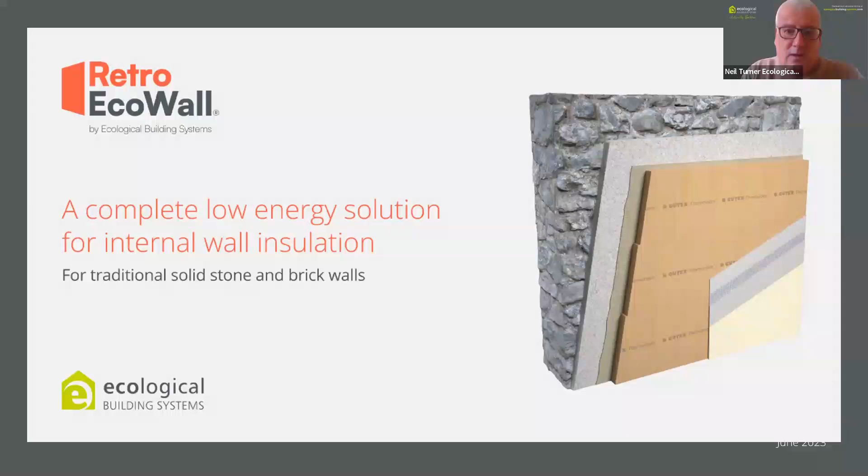Well, good afternoon, everybody. My name's Neil Turner. I work for a company called Ecological Building Systems. What we do as a business, we supply the whole ProClima range of air tightness membranes, tapes, and seals. But then we also supply a range of natural insulation products. So we supply wood fiber, hemp, jute fibers, and also a new product that's made from grass. For some reason, I've locked up. Here we go.

So just to say a little bit about myself. I'm a bit strange, really, because I'm a scientist by education. But for the last 25 years, I've worked in the construction industry. Most of my experience is manufacturing Warmcel cellulose insulation. But I've been with Ecological 9 years now. I'm still involved in a couple of CEN, Committee for European Norm standards, looking at test methods and developing new standards for new insulation products. And I'm also a former member of the Thermal Insulation Manufacturers Association Competent U-Value Scheme.

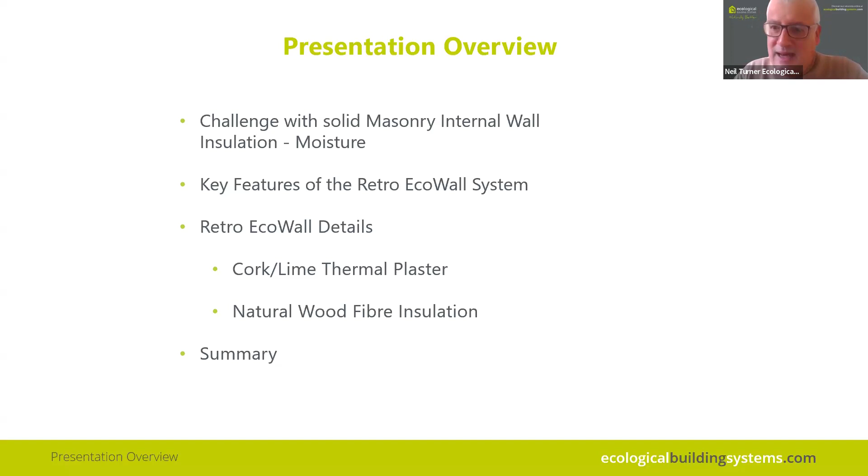So what I'm going to talk about briefly this afternoon is an internal wall insulation system for solid masonry. I'm going to start by talking about the challenges of insulating solid masonry walls as opposed to cavity walls, and some of the features that you have to consider. I'm then going to talk about what we call our Retro Eco Wall system. It's a combination of an insulated cork lime thermal plaster, used as an insulating base coat, and then natural wood fiber insulation. And then I'll summarize. So in terms of retrofitting buildings, the biggest issue that you can have with existing buildings is actually moisture.

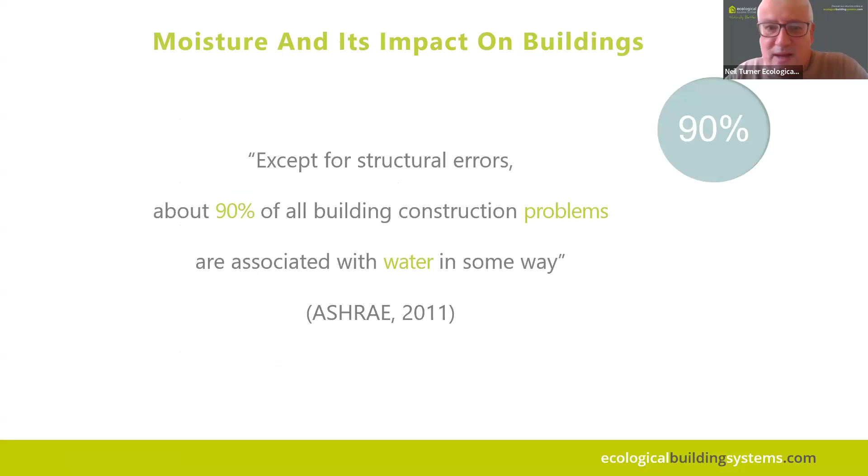So except for structural errors, about 90% of all building construction problems are associated with water in some way. And this is a particular challenge when you're looking to internally insulate buildings, solid wall buildings. So if you look at the UK as an example, we have a number of different types of solid wall. So you can have a solid brick wall or a rubble stone wall, and then combinations of rubble stone wall with brick backing, or you can have ashlar stone with brick backing or ashlar stone with rubble backing.

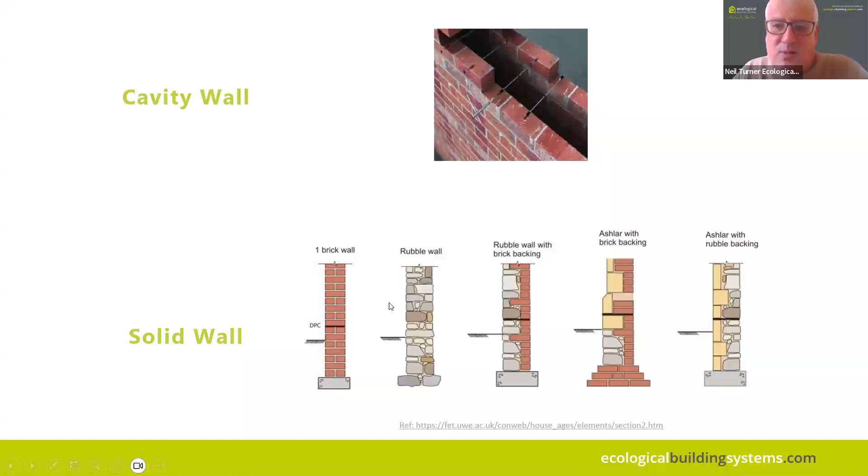Now, in the UK, it's estimated that we have about 8 million properties which are solid stone wall. Now, the main difference between solid stone wall and what you see up here, a cavity wall, and this took off in the UK in the 1930s. But what you have with a cavity wall, all things being equal, is that your inner leaf is actually protected from the effects of wind-driven rain by the outer leaf and the cavity. So it's less risky to insulate internally on a cavity wall than it is on a solid wall. So what you don't want to be doing is insulating your wall internally if there is a moisture problem.

You can also have quite a bit of built-in moisture within building materials. And also you can have rising moisture from ground level. Many of these old buildings don't have damp-proof courses, damp-proof membranes. And it's actually encouraged in some cases for moisture to be able to move both from outside to inside and inside to outside. So if you look at the mechanisms of moisture transport through a wall, it could be vapor diffusion, vapor convection, and also capillary action and surface diffusion.

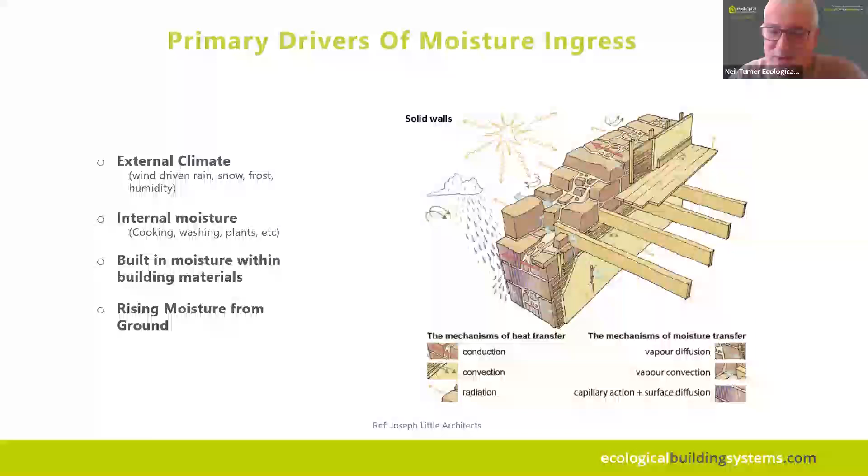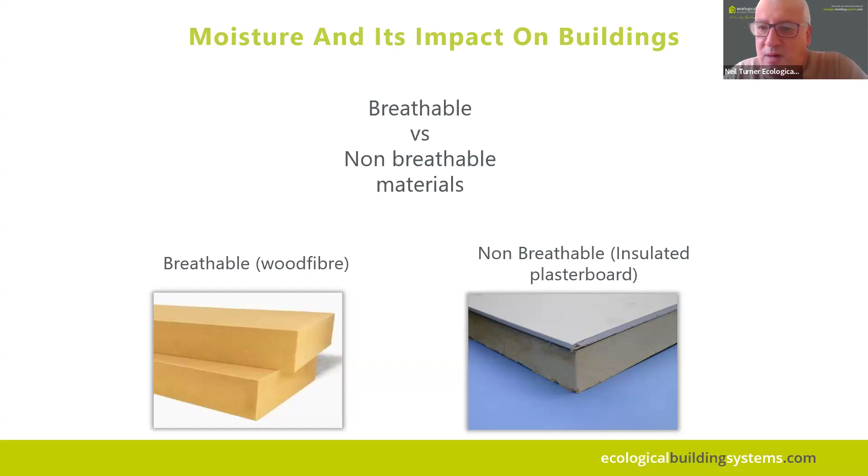So in terms of insulation, if you're looking at internal insulation, I know in Europe, many people opt for external wall insulation. But what tends to happen in the UK, a lot of these buildings, the solid masonry buildings, for planning reasons, you're not allowed to insulate externally because you're changing the appearance of the building. So many people opt for internal wall insulation. And there's basically two types of approaches that people adopt. So you can either use what we would term as breathable moisture vapor diffusion open insulation, or some people opt for non-breathable vapor closed insulation, such as insulated plasterboards.

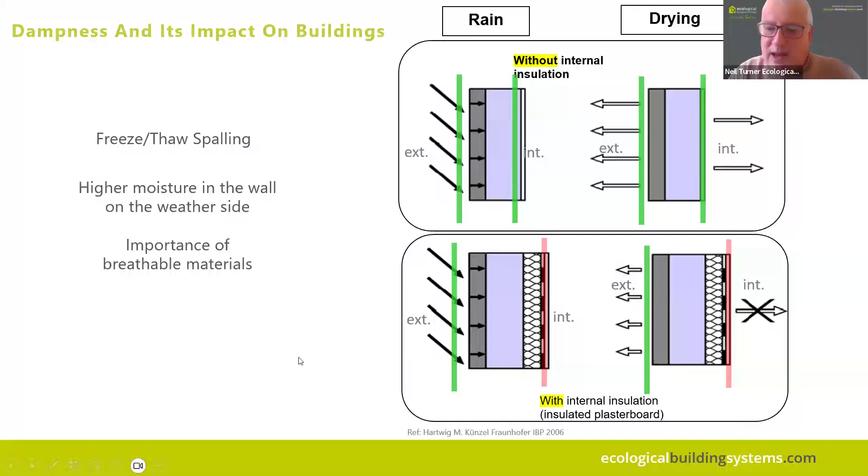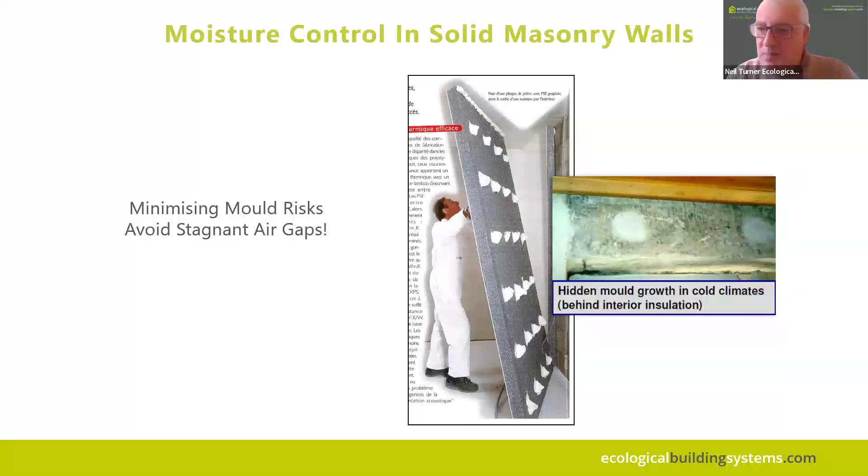The other thing to consider is you should always avoid still air gaps between insulation and your wall. This is a common technique that you see in the UK, where people actually use what they call dot and dab. So you've got this insulated plasterboard that's not breathable, and it's being dotted and dabbed onto the wall. And then that's trapping cold, moist air behind. So what we always promote are full contact systems, so that you've got a clear moisture diffusion pathway and no potential for mold or condensation in the cold still air gap.

It's always a good idea when you're insulating internally on a solid wall to do a hygrothermal assessment. The most common system used is actually WUFI. There is another software program called Delphin as well. But quite often, a lot of clients will just use the condensation risk software that you have with the U-value package, and that's known as a Glaser calculation.

Whereas WUFI has a lot more information that it calculates. You've got real climatic data, inside and outside temperature, and you can set the inside humidity depending on what you're predicting it is. It also takes into account the absorption of light. So if you've got a dark brick or a dark stone, that can absorb more heat than something that's very pale in color, where you get more reflection, so you can potentially get more summer back drying with a darker masonry.

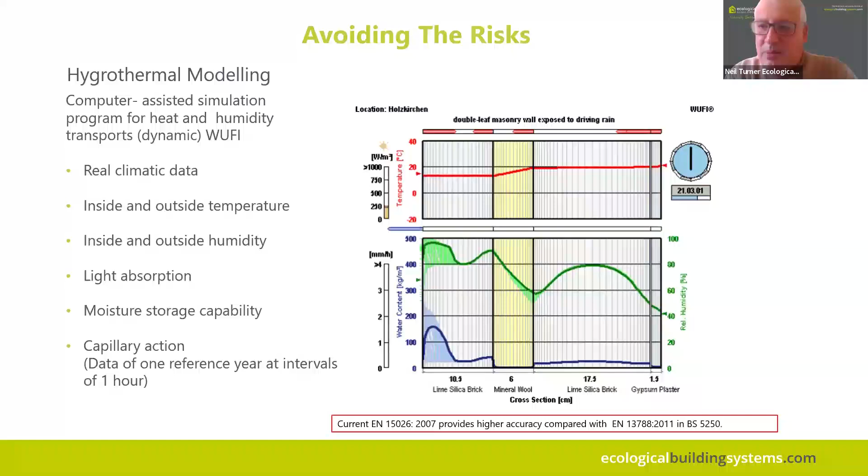Basically, the standard that WUFI operates to is EN 15026, and it's more reliable for solid masonry walls than the Glaser method. Now, in addition to breathability, another benefit is if you use insulation materials which are what's known as water capillary active. In other words, they can absorb some moisture, but then harmlessly release it when the climatic condition changes. Capillary action is the force that causes moisture to rise against the force of gravity.

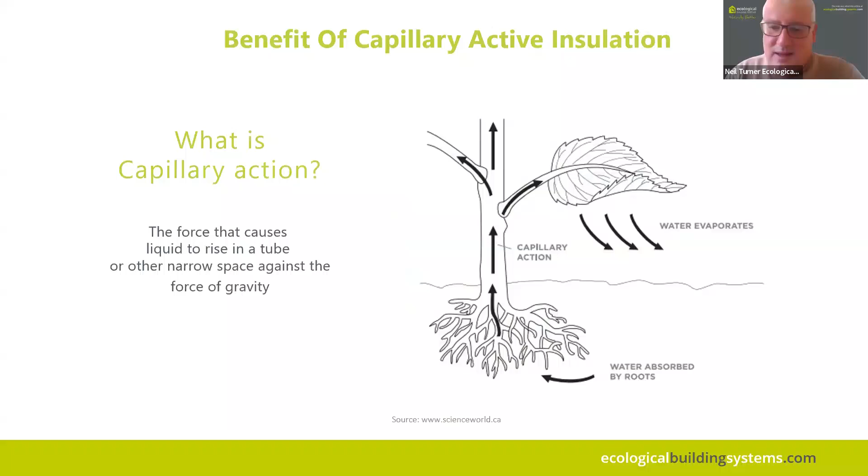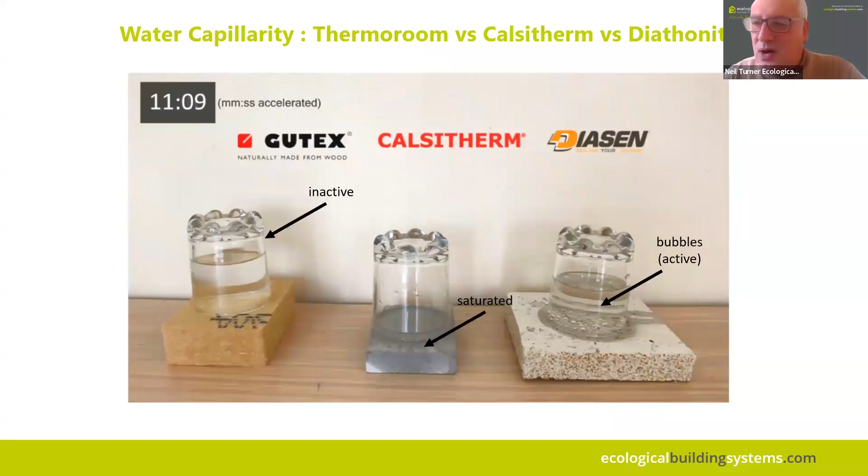I'm going to show you three examples here. On the left, you've got wood fiber insulation, which doesn't have a high degree of water capillarity. The one in the middle is a calcium silicate board, which is very highly water capillary active. And on the right, you've got a cork lime thermoplaster, which has some degree of water capillarity. So water capillarity is always a good idea to consider in these scenarios.

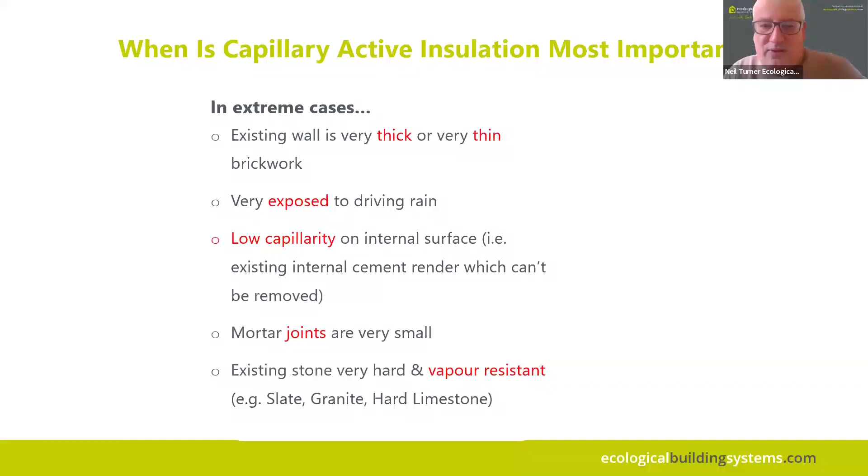If you've got a brick that's either very thick or very thin, if you're in an area that's very exposed to wind-driven rain, if you've got low capillarity on your internal surface, so if somebody's put a cement render on a wall and they can't remove it, then maybe consider a water capillary active system. And then the other two things are mortar joints, and where you've got highly vapor resistant stone, such as granite.

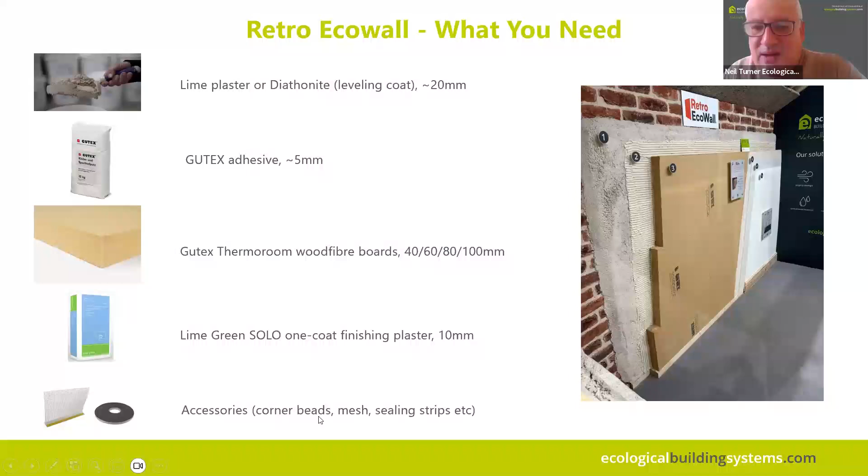So this is our main internal wall system, and it incorporates all of the things that I've just said. This picture on the right is at our display stand at the NSBRC in Swindon. What you have here is a lime level coat, and we actually promote the use of Diathonite as well, which is an insulating lime layer. Then you're bonding wood fiber insulation onto the lime level coat, and finishing off with a lime plaster and then breathable paint. There are other accessories as well, such as corner beads, mesh, and sealing strips.

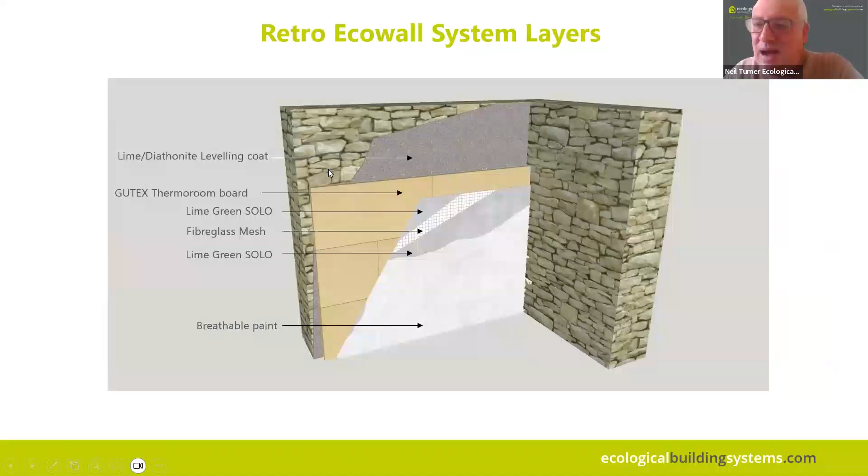This is just showing another schematic. This is your water capillary active insulating lime level coat, and you notice here that you're getting full contact between the insulation and the wall, with no air gaps whatsoever. So there's no potential to trap cold pockets of still air, which could give rise to mold. In the Gutex system we supply, if the wall's less than 3 meters, they recommend that you can just bond it with a breathable adhesive. If it's higher than that, they recommend using fixings as well.

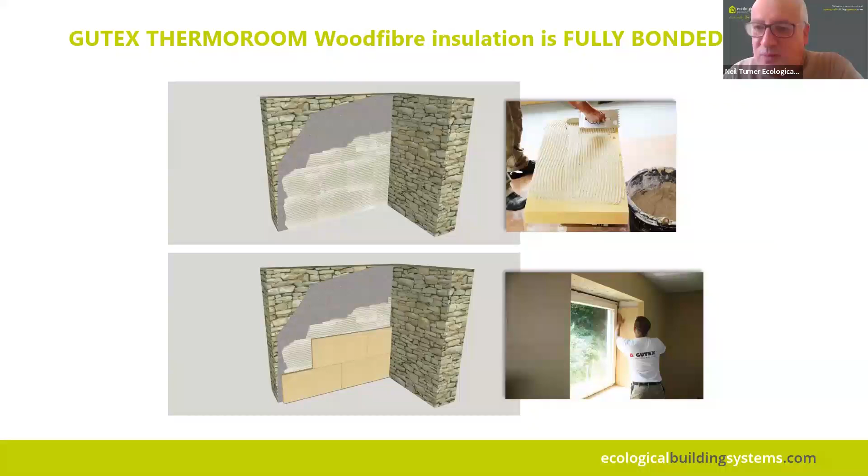I always like to show this in window reveals. It's always a good idea to install a thin layer of insulation. If you don't have any insulation in the reveals, you can get cold bridging, cold spots, and mold as well. So this is just the process. You've got your lime level coat, so you're smoothing off and creating full contact with the wall. Then you apply your wood fiber, and then this is your lime green skin.

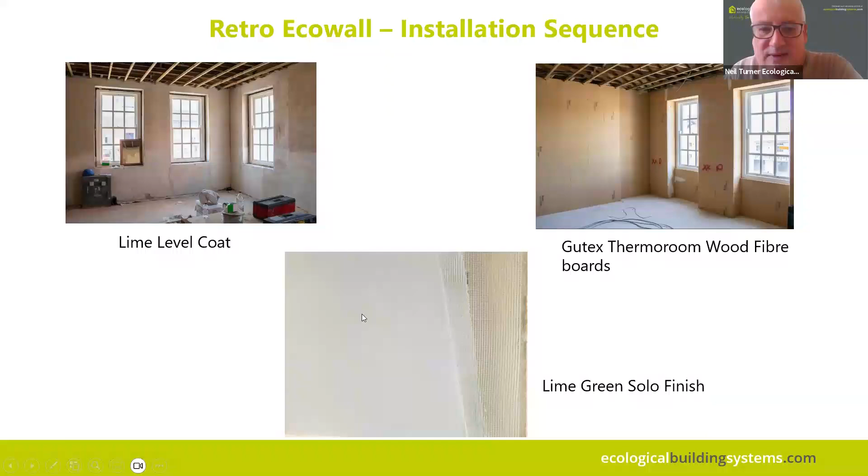Just to say a bit more about the Diathonite Thermactive. This is a product that we've been supplying now for quite a number of years. It's actually an Italian product. It contains cork and lime, a mixture of hydrated lime and hydraulic lime, and other additives such as perlite, silica, and pumice. This material is breathable, it's very highly moisture vapor diffusion open, and it's got a thermal conductivity of 0.037. We've had all of this tested by the BBA in Watford as well, which confirms those figures.

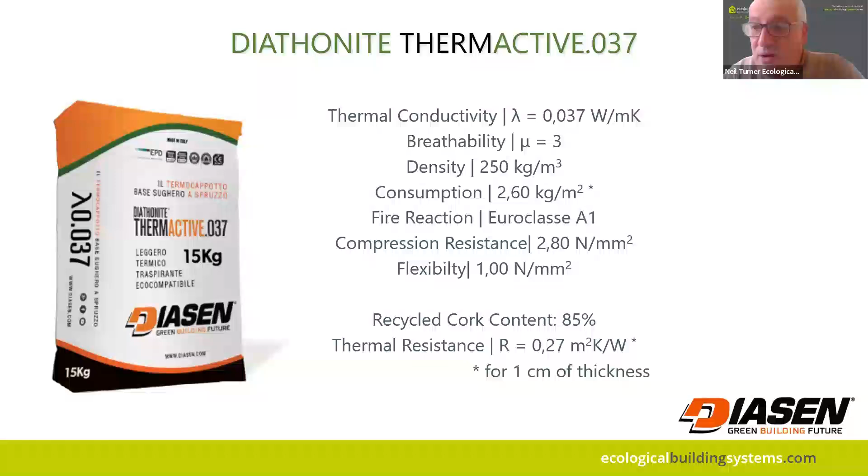It's got quite a low density. You can either apply this by hand or by machine. And it's also Eurofire Class A1 non-combustible. And it's tri-functional. It's acting as an insulating level coat, so you get full contact. Also, it's a moisture buffer because it's water capillary active. And also, it's an airtight layer. We've actually done some retrofit projects where this has been the airtight layer as well.

So the benefits of wood fiber insulation and other natural fibers: obviously you get good insulation in the winter, but also these products tend to have a high specific heat capacity, and they're relatively dense, so you actually get a reduction in summer overheating as well. Wood fiber is really good acoustically. Also, it's really quick to install. It's just like a tiling process. Richard mentioned Nature Plus. I think all of the wood fiber products on the market are Nature Plus certified. And again, they're breathable.

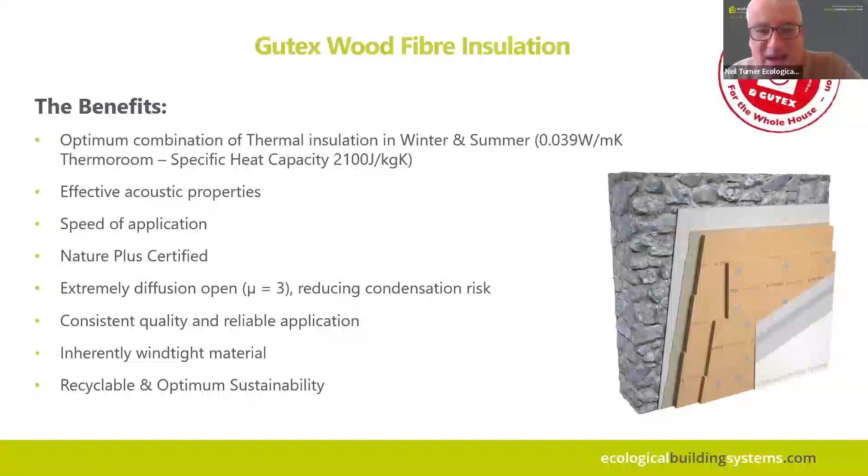This is just showing the kind of U values that you can achieve. What we always say to people is do not try and over insulate a solid masonry wall. I know the ASBP and the Natural Fiber Group have done a lot of work on this. You tend to get your biggest bang for the buck with the first 50 millimeters of insulation that you install. But the theory is if you over insulate, you make the interface between the existing masonry wall and the insulation much colder. And then you've got more potential for what's known as interstitial condensation.

So you're typically looking for U values, maybe 0.5 down to 0.4. Some clients try and go down to 0.3, but this is when it becomes very important to model properly with the WUFI software.

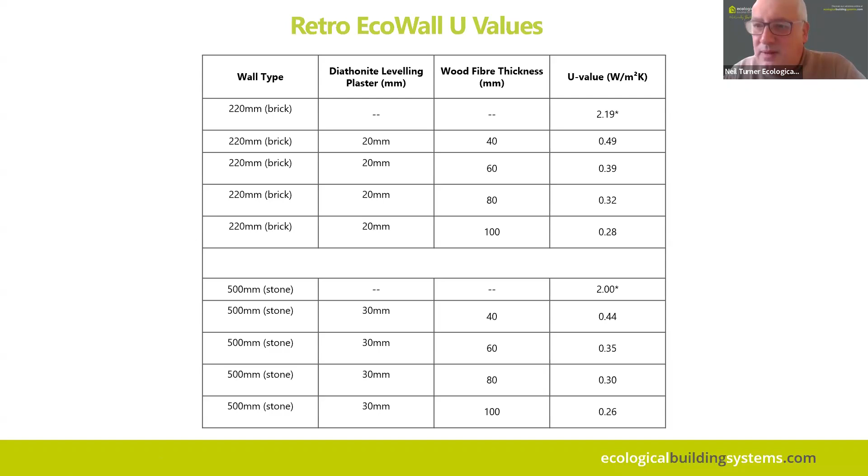So in summary, the system is moisture vapor diffusion open. You've also got a water capillary active base coat, so you can actually absorb a bit of moisture which may transfer through the brick or the stone, and then it gets released when climatic conditions change. You've got full contact with the wall, so there's no still air gaps. And obviously, these natural materials have really good carbon profile. A lot of these materials, like wood, are absorbing CO2 when they start life as a tree and releasing oxygen. And then when you build with these materials, you're locking that stored carbon into the building as well.

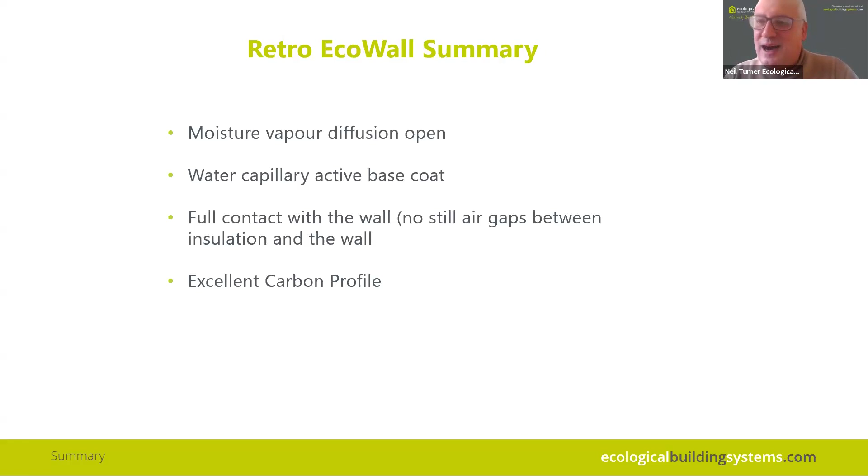So I think I've just about done 19 or 20 minutes. So that's a very brief overview of our Retro Eco Wall system. Thank you.

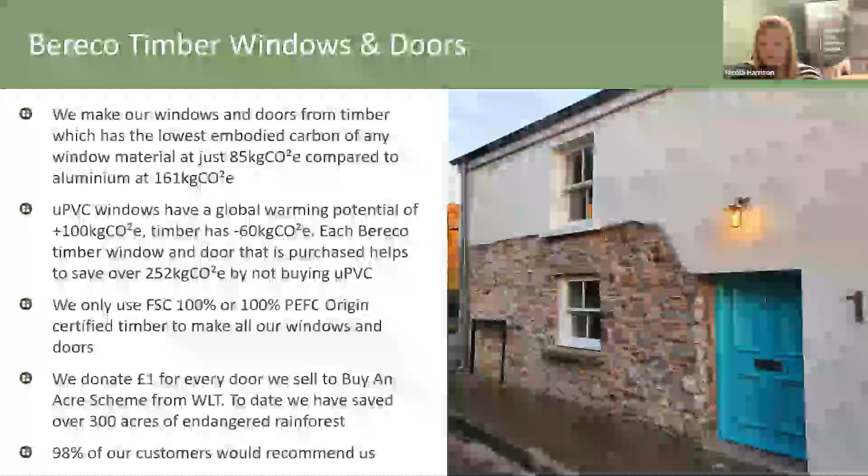So in terms of the windows, they're manufactured, assembled, and then delivered fully factory finished. The coatings that we use are all water-based, breathable, no heavy metals in that paint whatsoever. So very nice natural materials all the way through.

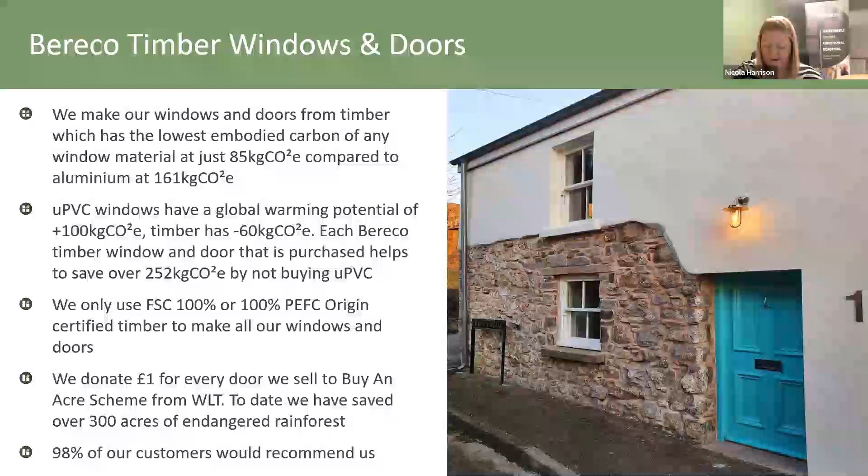So we're going to go on to talk a little bit about, like I said, some case studies, and we're gonna have a look at a couple a little bit more in depth, and then we're gonna have a look at another couple, and then if we've got time, I'll talk a little bit about the regulation changes that have happened, particularly in existing buildings when it comes to windows, a little bit later on if I get the chance. So this is the first of my case studies today.

It's the guardhouse in Winchester. It's got some real history, this one. It's on the site of where William the Conqueror originally built a castle in 1067. Very, very old, lots of historic memories. The castle that sat there was extended in the 13th century by King Henry III, and then

in the 17th century it was besieged in the English Civil War and partially demolished. Later on in the 17th century, King Charles II decided he was going to have it as the site of his King's House. Unfortunately never finished by Christopher Wren, it was subsequently abandoned, and then the site was leased from the Crown to be used as a military barracks, and then the guardhouse was built in about 1901.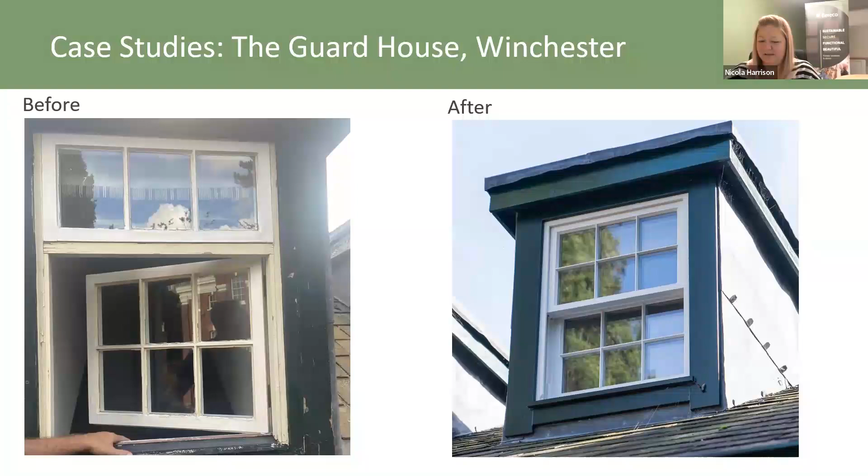So now on to another lovely project that has been 10 years in the making. This project is the windmill in West Chiltington. Another one with some real considerable history. The mill was originally called Meaton's Mill, and it was built at Monkmead, and then it was moved to West Chiltington in 1838, and then first appeared on the maps in 1840. So the official date was 1840.

The next stories originally were faced with tarred weatherboarding, and then it had the boat-shaped cap on the top. There's only ever been 2 of the sweeps intact since it was converted into a residence, and additions were made to the southeast and southwest of the property for living areas. So the clients that we worked with on this renovation actually took this renovation on themselves and the installation of the windows. They were very brave.

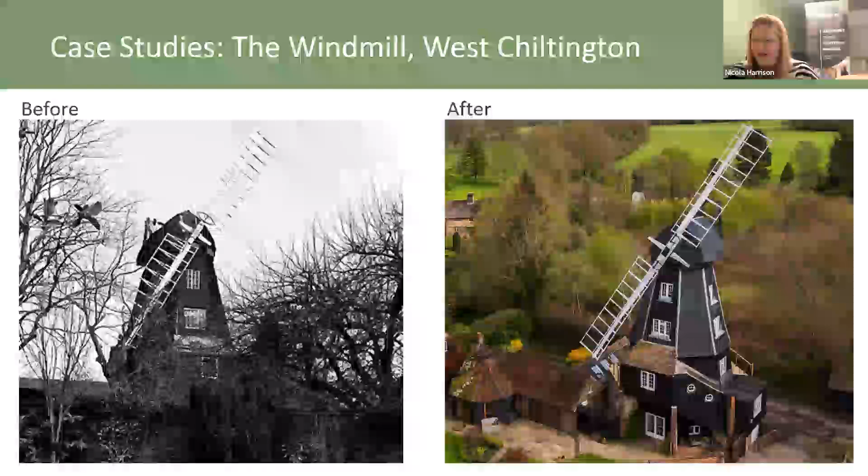But as you can see, not a lot of these windows are very square. The openings were somewhat wonky. They've had to fit them as square as they possibly could within the openings. So that did present somewhat of a challenge. One of the biggest challenges was scaffolding. To be honest, scaffolding a project like this is not an easy job.

They got caught up in COVID, and then during COVID, they did the next stage of renovations, which was plumbing, electrics, staircases. Again, they continued to project manage themselves, and that's when all of the ground floor and first floor windows were installed. And then it took them another few years to brave the 2nd and 3rd floors. But now they've got there, and in early '23, the scaffolding was erected and they got up to those floors.

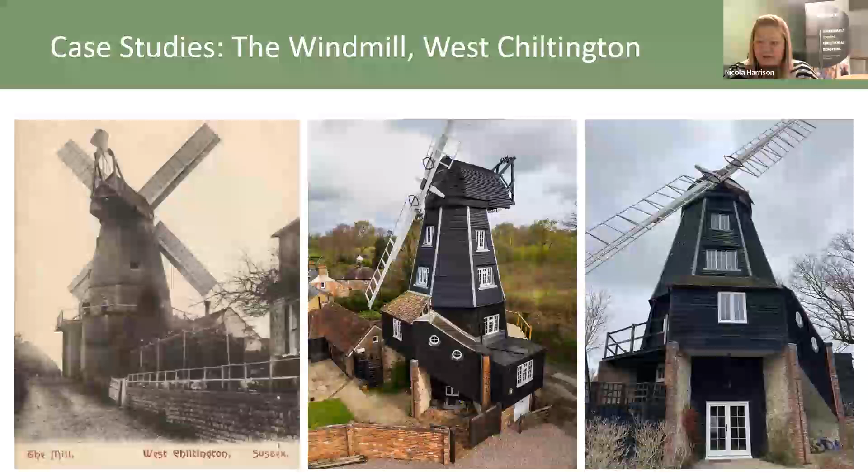So these windows, the original mill had Crittall windows, but the client wanted timber because they wanted to replace all the timber boarding as well. Horsham Council agreed that they could have the timber, but the client was quite keen on not only retaining that traditional design and appearance and keeping the history of the building, but they also wanted to improve the EPC on it, because it was running at an F, and it was too low. They wanted to improve that where they could.

So the client went with what we call our heritage flush casement. So it's a casement window where the sashes fit flush within the frame externally. They incorporate 16mm narrow cavity glass units, and that was to retain the slim frames around the edge as much as possible. Obviously, Crittall were quite thin.

But they opted for the narrow cavity units just simply because they were trying to get that U value down. They were trying to improve that EPC on this property. And with the narrow cavity units in the flush casement, they managed to hit 1.6 on the U value. Certainly a lot better than it would have been if it was single glazing, between 5 and 8.

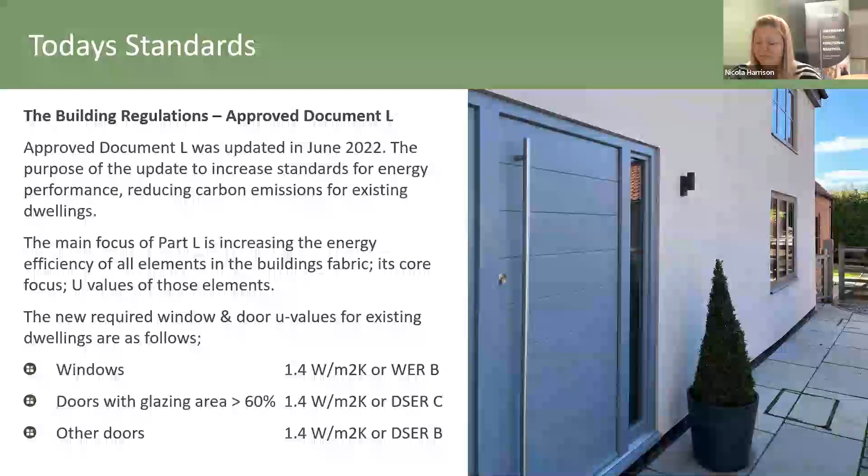If you can't get the proof of that U value, don't take the risk. Your local authority will not deem them to comply with the building regulations, and you will be told to replace them. So quickly, there's just a few others.

There's more. The other two main ones are Part F, ventilation, and Part K, which is protection from falling. Part K has been there for a while. The compliance is pretty easy to prove with kite marking on the glazing in terms of safety glass. But when it comes to ventilation, then we now need to incorporate trickle vents into the windows. And then there's a host of other building regulations there that we need to be complying with whenever we're doing replacement windows and not making them any worse than what already exists.

The one thing to note here is Part Q and Part O are more for your new builds. Part Q, however, is in consultation at the moment for existing buildings. We do expect in the next couple of years to see Part Q being introduced into existing dwellings. So if you're doing a renovation and you're thinking about replacing windows, seriously consider a supplier who's already got windows that are tested and certified to PAS 24:2022.

And last but not least, they get a bad rep, but competent person schemes really are there to help you. They're there to support you in navigating, obtaining permission for replacing your windows and doors. Using one of these people means that you don't have to do that. If you use a FENSA, Corgi, or a Certass certified installer, they will do the installation for you. They'll register it with building control.

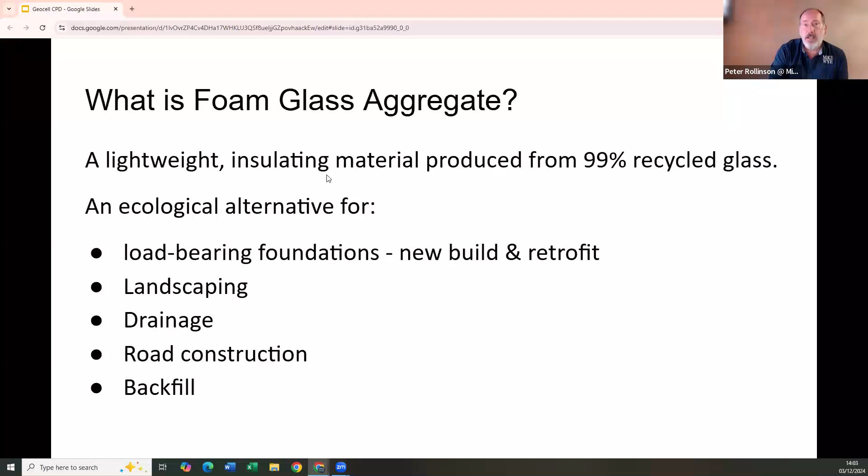There are also other applications: landscaping, drainage, road construction, backfill, and so on. So a variety of applications. The vast majority of what we do is insulated floor build-ups, basically. On the production side, we sell a product called Geocell, which is produced in Germany by the parent company, a firm called Veriso, who are dominant in the recycling industry in general, and therefore have fantastic access to a marvelously huge supply of glass coming through the recycling system. The glass is ground into a powder.

Raising agents are added. I think that's glycerin and potassium, and sodium silicate as well, I believe, from memory. That goes through a series of kilns where the product rises. It's referred to by the people that make it as a cake, because it's the best way to describe it, I suppose. It goes up to over 700 degrees C, possibly up to 900. As it emerges from the final kiln, it cools and starts to fracture. As the temperature changes, it's then further pulverized and graded into the correct size. We're using aggregate sizes of 10 millimeter up to 60 millimeter or thereabouts for the work we're doing.

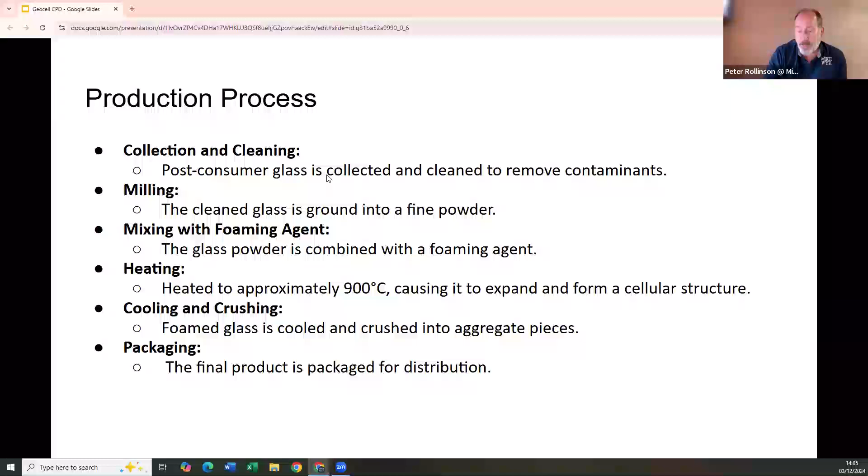Then it's distributed. We bring the material in bulk to our base here in West Devon, and we bag it here for supply throughout the UK. We also supply direct loads of loose material, for example full loads, direct to sites all over the country, which we're very keen on because it's much more efficient to do it that way. It depends on the volume that you need.

So, key properties. It is primarily used for insulation, but it has a few other somewhat unique properties which make a lot of sense when you compare it to alternative materials and floor build-ups. It does have low thermal conductivity. It is moisture resistant. It's made from glass, so it can be fully submerged in water as long as the water drains away, which it can because it's free draining. There's no damage or decay to the material itself. In situ, we would expect it to remain in a dry condition.

However, if it's in a building which is flooded, for example, as long as the flood water has a suitable escape route and can vacate relatively promptly, there's no ongoing damage, and it would also dry out a great deal more quickly than a conventional floor build-up, which we'll have a quick look at in a moment. It has high compressive strength, so it is a load-bearing element. In most of the settings we see, it's used as an insulating subbase.

Following compaction, the material has a compressive resistance of 275 kilonewtons per square meter, which equates to just over 28 tons per square meter. For all of the domestic purposes I've seen, that's perfectly adequate. Now and again you'll get the odd engineering question about loadings. There was one recently about a mezzanine floor supported on pillars going onto the floor below, and it wasn't a complex question really, just making sure that the loading and the footprint weren't likely to exceed the capacity of the material.

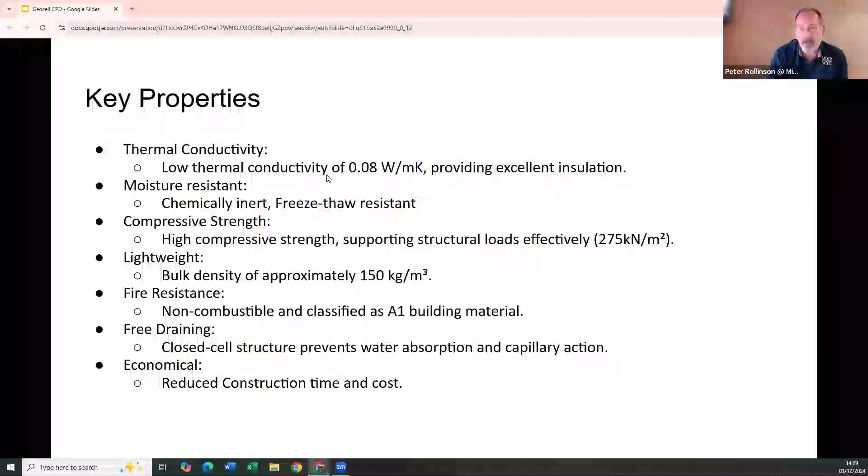And I think the other angle that we deal with quite a lot is the comparison between conventional floor build-ups and a glasscrete floor. The conventional floor build-up, I'm sure many of you are perfectly familiar with this, but very briefly, as you are likely to know, we've got compacted hardcore, sand blinding. We're looking at DPMs, concrete slabs, insulated material, underfloor heating systems possibly, and a screed on the top.

All of these materials represent a certain amount of depth, and therefore combined a total depth of excavation, which can be fairly considerable. Also, all of these are layers of material with their own individual material cost, and possibly most critically of all, they all represent a process for installation and therefore time and labour costs. So you may have a system such as this, which is thermally reasonably good performance, because it quite often has PIR insulation, which is low thermal conductivity. Not something we're keen on for all sorts of reasons, but it does that one thing rather well.

However, there's no moisture management benefit with this type of floor system. And what we would often fear that we would see, especially with retrofit in older buildings, the use of impervious floor systems can, in many cases, under hydrostatic pressure, cause ground moisture to accumulate and to be pushed laterally into the feet of the walls, creating damp problems and associated issues there.

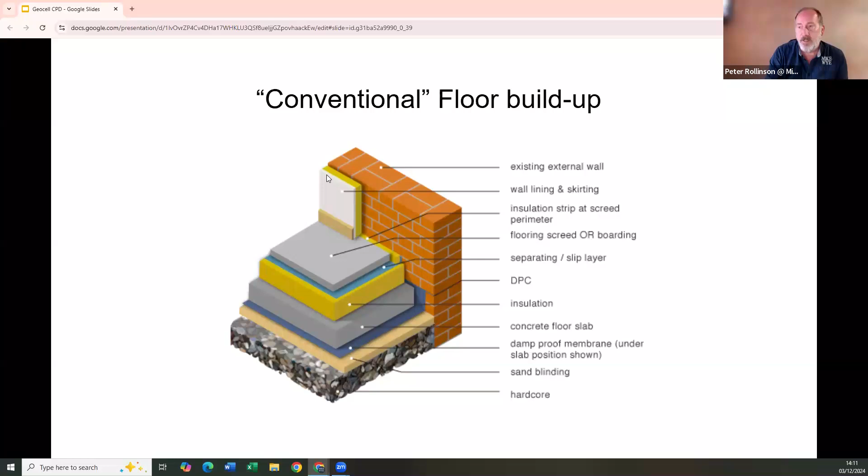Here we have an example of what we would expect to approach retrofit with in an older building, or indeed, any form of retrofit. There are new build applications as well for Geocell, for foam glass, which we'll have a quick look at in a minute. As you can see, the virtue of simplicity, in essence, it's two ingredients really. You've got a layer of foam glass aggregate underneath, and then you've got a lime screed on the top. In addition to this, we would use geotextile membrane below the Geocell and on top as well. It's really a separation layer. It's just to prevent material migration from one zone to the other.

In this case, also illustrated, we have an underfloor heating system, a wet system, that is generally fixed through to clip rails, which are fixed to E-grid, which is a plastic grid, laid on top of the Geocell, and then the lime screed is basically put directly onto that, and the underfloor heating is embedded in the base of the lime screed. If there's underfloor heating, it will be 100mm thickness of screed that's advised.

And final ingredient really, a strip of cork at the perimeter, which is there primarily as a thermal break between the screed and the wall, but also it's a decoupling item because it's moderately compressible material. If we do see any minute expansion in the screed, even just on a seasonal basis, it will therefore prevent those forces being transmitted to the walls. So it's thermal and decoupling as well.

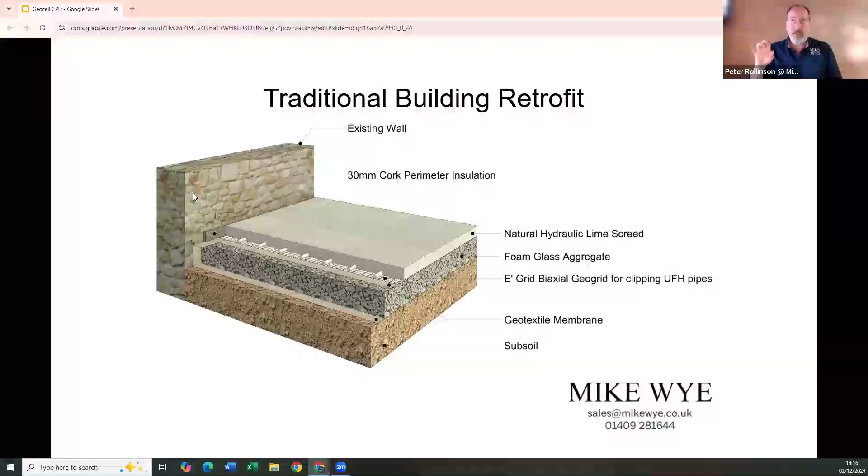There's no single depth which will apply to a given U value across the board. We're very happy to do U value calculations with people. We spend a lot of time doing that sort of work. And it's a combination of the floor area and the length of the exposed perimeter that we take into account. So there's no single depth which gives a set U value in all cases. But as I mentioned, in most situations, we'd expect between 150 and 250 mil. Screed on the top, 100 mil if there's underfloor heating, 75 without, and then floor finish as the final item.

In new construction, this does include, as I'm sure you can see, a DPM, damp-proof membrane. As I'm sure many of you know, with building regs, if it's a new build, you're going to have to use a DPM. It's almost always insisted upon. We would perhaps prefer not to. However, the foam glass still works perfectly effectively beneath a DPM. In fact, in continental Europe, where it comes from, it's almost exclusively used under concrete.

We would lay the DPM over the foam glass, and then in that case, because we've got a vapor impermeable layer of material there now, we would tend to say, yes, you could use a lime screed, but in most cases, people will opt for a cementitious concrete screed, which is likely to be a little bit slimmer than a lime version, and possibly a little bit quicker and a little bit cheaper as well.

But as you can see, with a strip footing, the Geocell foam glass occupies a space inside the ring of the foundation, as it were, and we would simply seek to see that the components are correctly configured, so we have no issues with the capillary transfer of moisture there.

And taking it a stage further, perhaps, with new builds and perhaps aiming for the lowest possible U values, so passive house kind of territory, it's not uncommon to have a concrete raft foundation, and you would start off with the entire site being cleared out and excavated to required depth. In that sort of setting, you're likely to see the foam glass component probably somewhere between 300 and 500 millimeters in thickness, maybe even a little more.

So on a reasonably sized building, yes, there's quite a volume of material there. However, it's a load-bearing insulating material, so it's doing several jobs at the same time. So yet again, the material cost might be a certain figure, but we would be very keen to take into account the reduction in other associated costs. It is a material that goes through a stage of compaction. It's laid as a loose fill, roughly leveled, and then compacted. We'd normally be looking at a compaction ratio of 1.3 to 1.

So you'd effectively look at your final volume in situ and add 30% to account for the compaction stage. And the compaction of the Geocell is not pulverizing the material and smashing it up. It's more that the vibration and the weight of the kit that you use is going to shuffle and push it down into and among itself. And the nature of the material is that it's very high friction, and the lumps of aggregate are irregularly shaped and quite jagged and angular.

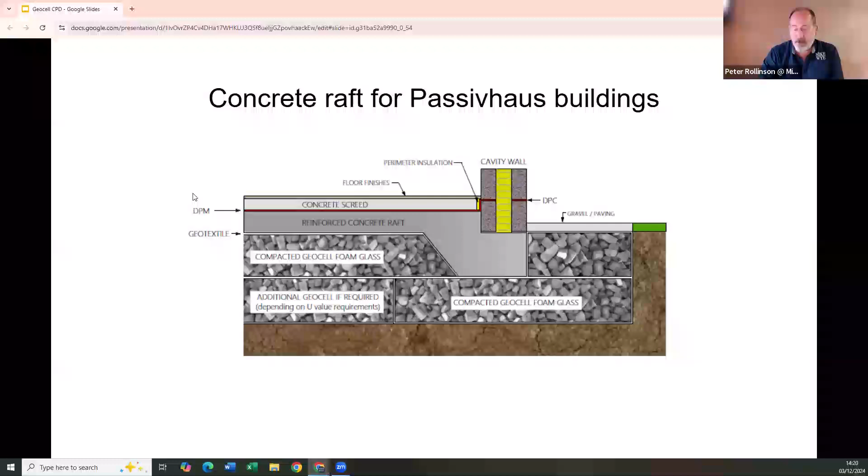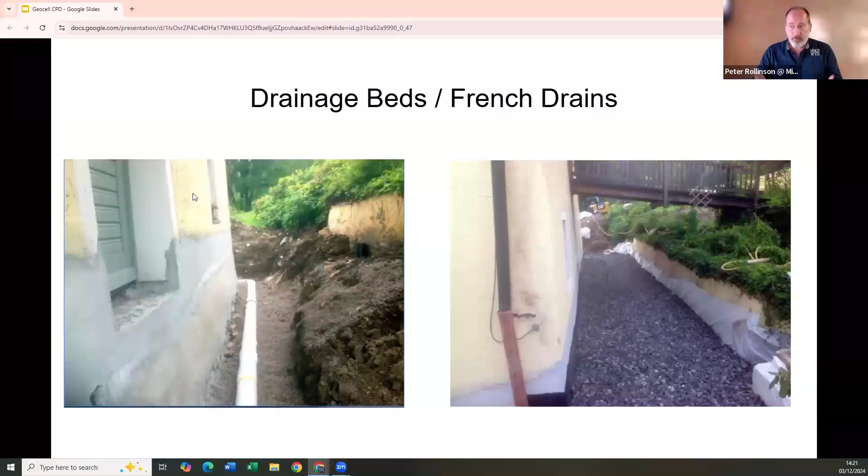In addition to the drainage, it's also providing a thermal break. It's a little bit of thermal isolation for the foot of the wall from the subsoil. So it has a positive contribution to the bigger picture there in the round, as it were. So useful for that sort of thing.

Very briefly, district heating, not something very prevalent in the UK, although it should be, and it probably will be as time goes by. Much more popular on the continent, where they seem to have a bit of a talent for forethought, you could say. But again, very useful material, highly stable, but obviously in the case of a heating system, providing that extra layer of thermal isolation between the heating conduit itself and the subsoil. So something we would hope and would like to see more of.

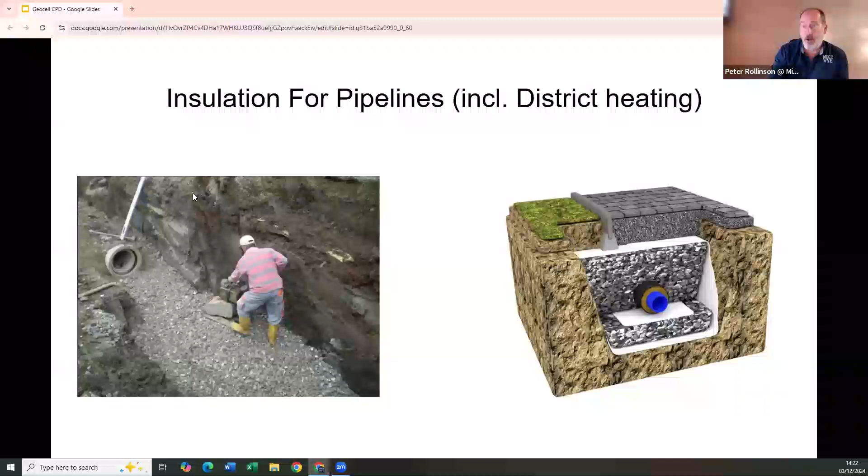There's been a lot of work, I know, with movements towards ultimate net zero and so on, and how we can reconfigure the systems that we live in, and district heating is going to be a very important component of that, hopefully.

Also, very briefly, I don't think I've ever dealt with a project from a sports arena, but I know other people have. We've dealt with some other larger projects too, which have been quite interesting, but not one of these in the UK, to my knowledge, but I could stand to be corrected. But as you can imagine, free draining, highly stable, very useful. There's a stadium in Europe where this was done, and the advantage there was that there was a car park underneath. So this layer of lightweight aggregate was fantastically useful because of lightweight as much as anything else.

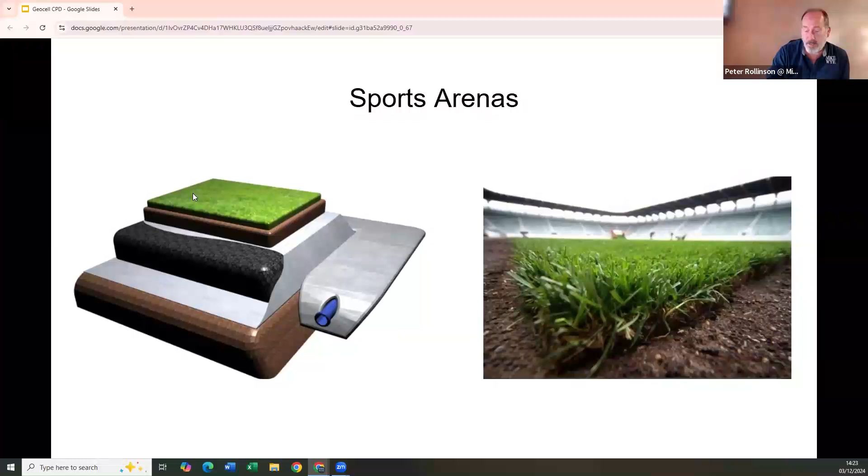That's a railway tunnel, I believe, embedded there. Yet again, as you might spot, quite clearly not in the UK. I'd really like it if civil engineering projects like that were to adopt Geocell, but it's a slow process there. But yet again, used because of stability and lightweight, basically, and a free draining nature.

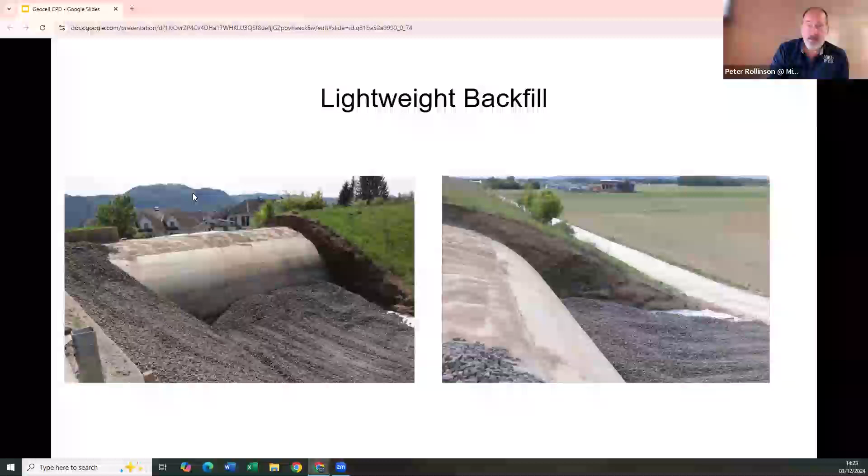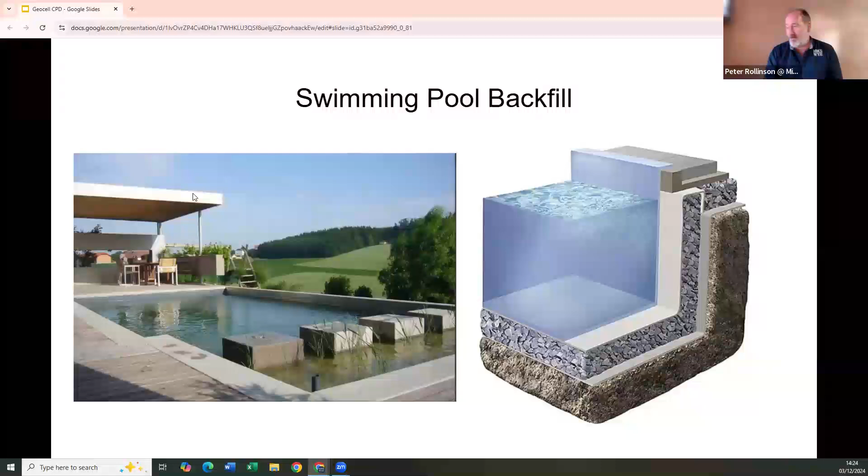And something which crops up fairly rarely, but it's always an interesting one, an insulating sub-base and sort of surrounding jacket for a swimming pool. So yet again, very useful, thermal isolation and stability and load-bearing properties. So not something, as you can imagine, that's in everyone's backyard in this country, but there we go. So that hopefully